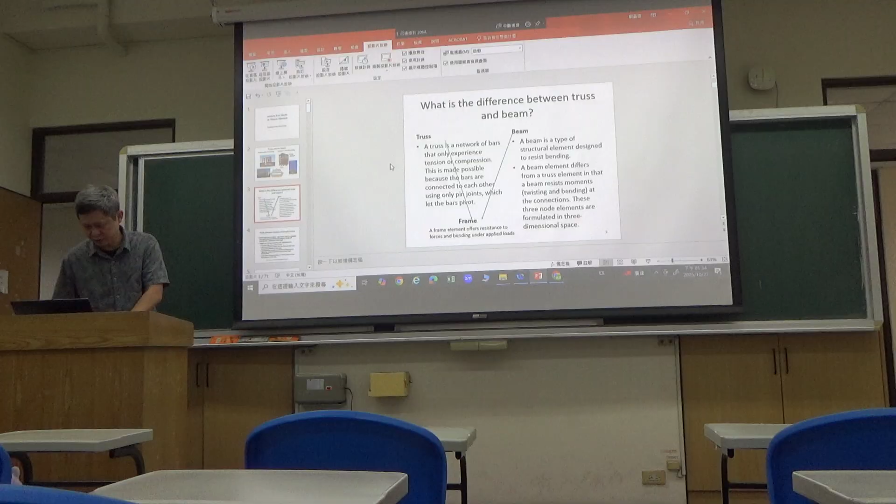Let's see. Okay, anyway, I'll try from here. See if the projections are working. Let's see. Wait a second, the projections...

One example of a beam structure is the bicycle frame. A bicycle frame not only needs to resist bending, it also has to support axial loading. So in this case, we combine beam together with truss to model a frame.

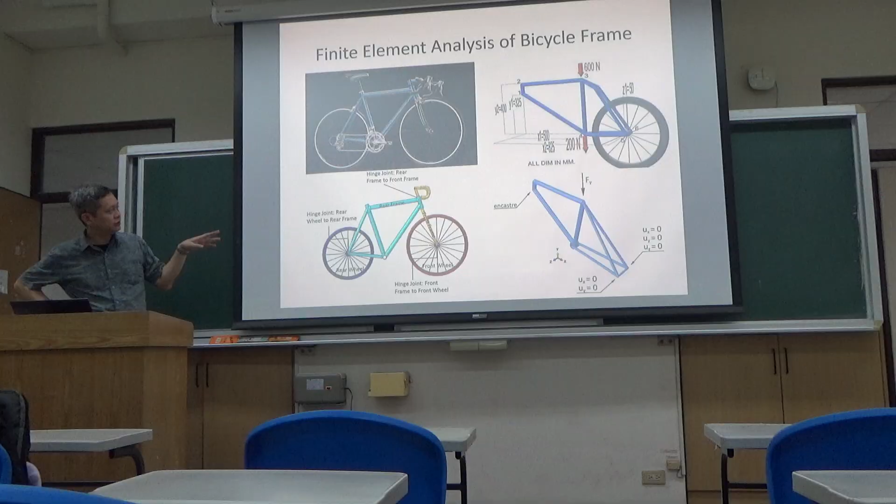Another example of a beam bending test can be seen from the ground testing of the F-16 frame. Let's watch a video of the ground vibration test of the aircraft, where the beam is bent. Let's see.

So this is a video showing the cantilever wing being tested. Okay, hold it up. Okay, where's the sound? You see, they've got the sound adjustment.

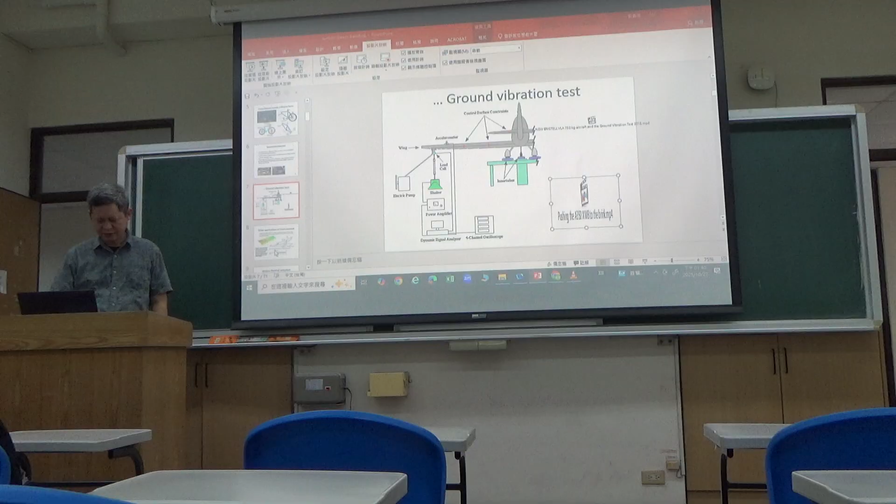In the sky, how strong does the wing need to be for an airplane? You can watch one or two examples of the structure. Because in the sky, the airplane wing, even though it looks like a cantilever, will be interacting with the air. The air will form vortices, and the vortex will go up and down.

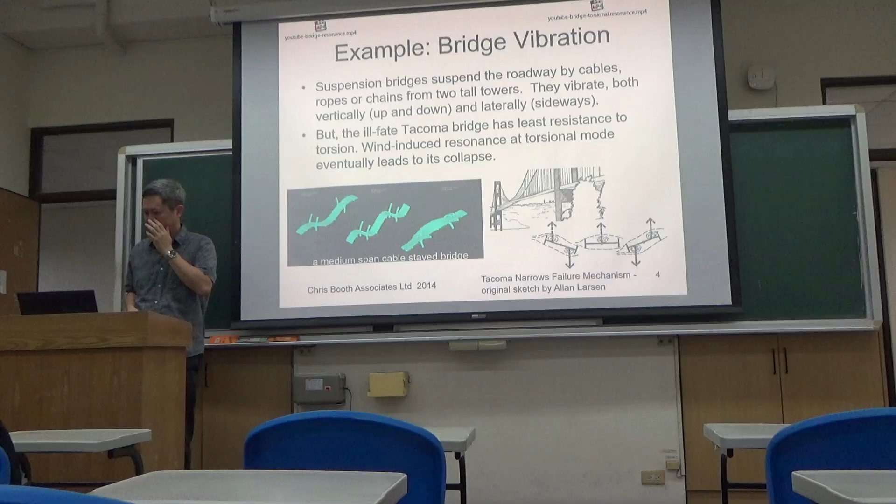This happens to be the same as with a bridge. The bridge is actually kind of like a structure, but the road surface of the bridge could be excited into bending, and that bending can happen quite differently. Let's watch the bending of the bridge, in an exaggerated way.

This is one kind of beam bending of the bridge. This is still a build-up structure, not a single beam. You can also see the torsion of the bridge.

Next we'll come to see the bending of the aircraft structure induced by the air. So the first example will be the bridge, and then later you'll see the aircraft structure bending. We're going to have the sound.

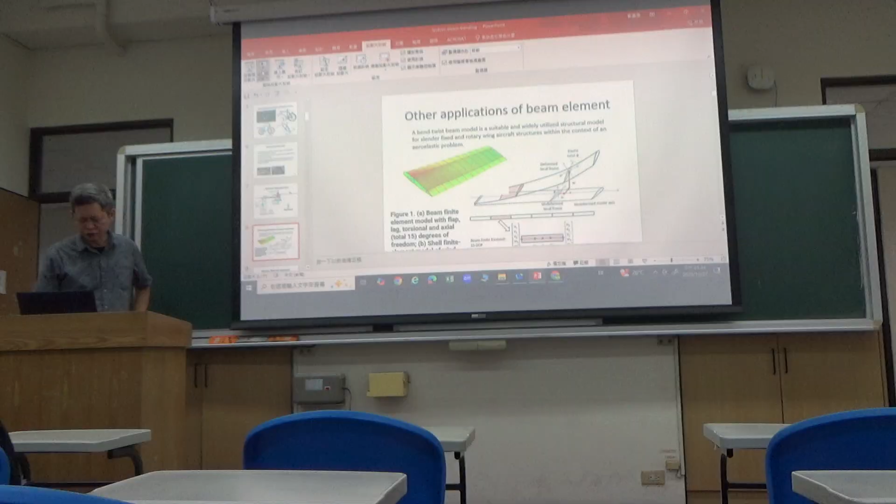So with this, now we know it is important to understand the vibration of the beam bending. But to start, we are not going directly to the vibration - we start with the static deformation. So how do we model this?

How to model an airfoil? You can model it in 3D form - it's made out of trusses, it's made out of the skin. Ideally you can model all the detail, but it is also possible to model the wing as a simple cantilever to give a first estimation.

For a beam element, you can break it down into many elements in series. This is still a cantilever, even though you've broken it down into a series connection of beam elements. However, if you break this into trusses, this is not a structure.

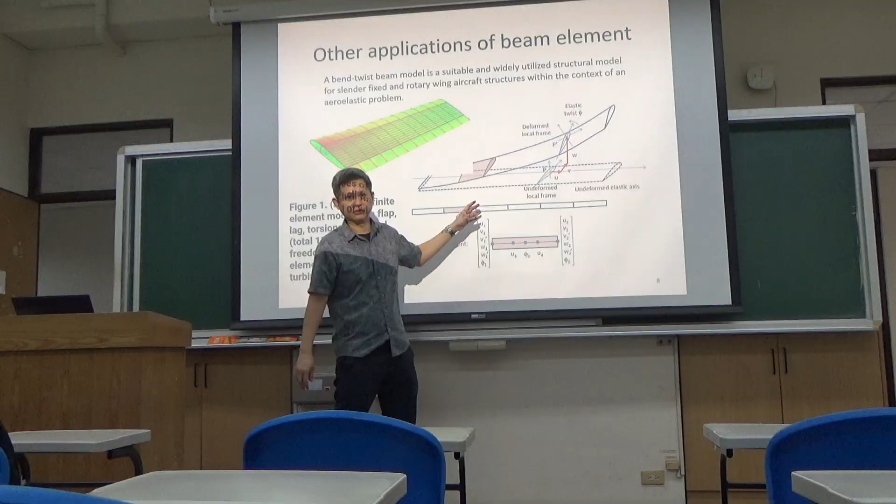So when we find this kind of beam element elsewhere, you can also find them on the bimetallic coil. A coil is also a cantilever. Take for example this bimetallic coil.

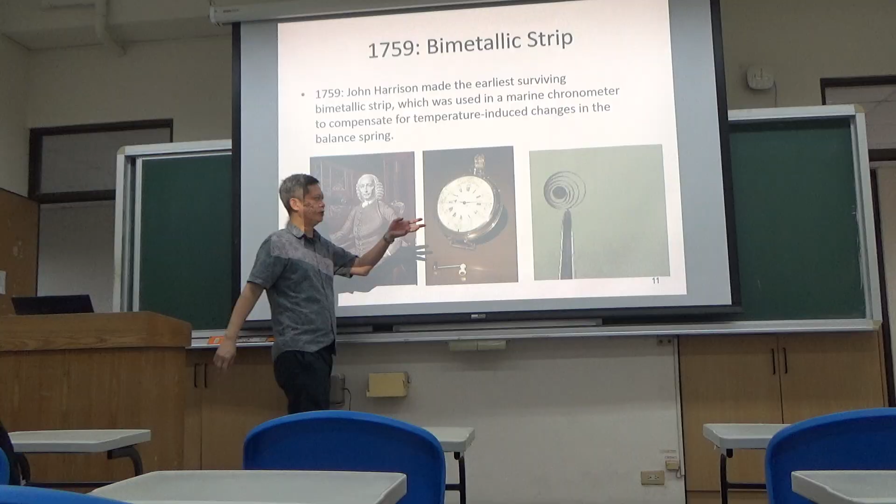You have a coil made out of 2 layers bonded together - the 2 layers are copper and iron strip. They are bonded together. When you heat it up, because of the difference in thermal expansion, you're going to have the unbending. This kind of unbending is okay.

So another form of the beam could be a bimetallic layer. Other than bonding materials of 2 different thermal expansion coefficients to generate bending, it is also possible to create displacement with the bending of a V-shaped beam. You have 2 segments - if you have thermal expansion in both legs of the V segment, you'll get apex motion at the tip.

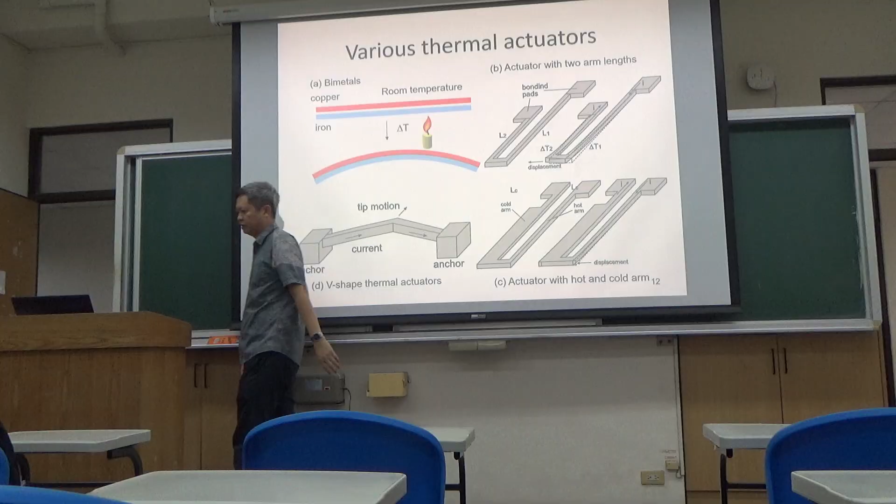Likewise, if you connect a long beam with a short beam, when you heat it up, because of the difference in thermal expansions, you can also generate bending. Lastly, you can also introduce bending by introducing a passive segment. Heating happens at the short segment here and the long segment here - the cold arm, which is wider, is not expanding or heating as much.

How do we model the beam bending? If you are using the V-shaped beam as an example, let's see - this is still about the application. You can see this kind of main structure.

It's built on top of the wafer, so you are making a very tiny beam. When you do the heating up, this V-shaped beam will undergo deformation - when you heat it up, it will expand.

So how is this expansion going to be modeled? If you model them as a rigid body, or linkages - this is what you're going to have.

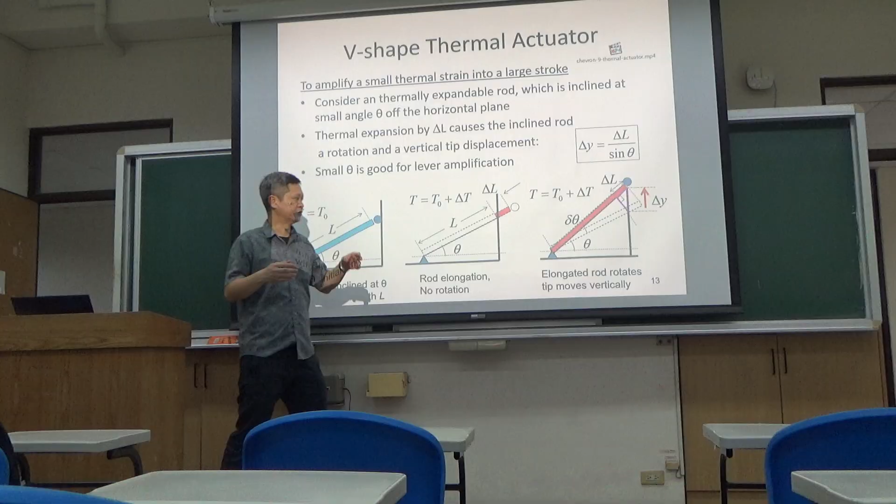This is a pin supported linkage which has the thermal expansion. So you can model this to find out what is the vertical displacement.

But in reality, beam is more than linkages because beam can resist bending. How are we going to model this beam bending? We have a very simple idea about beam bending. How do you model beam bending? You model it as a circular arc. Assume you have a prismatic bar. If you try to bend it into circular arc, one geometry you notice is you will form concentric circles.

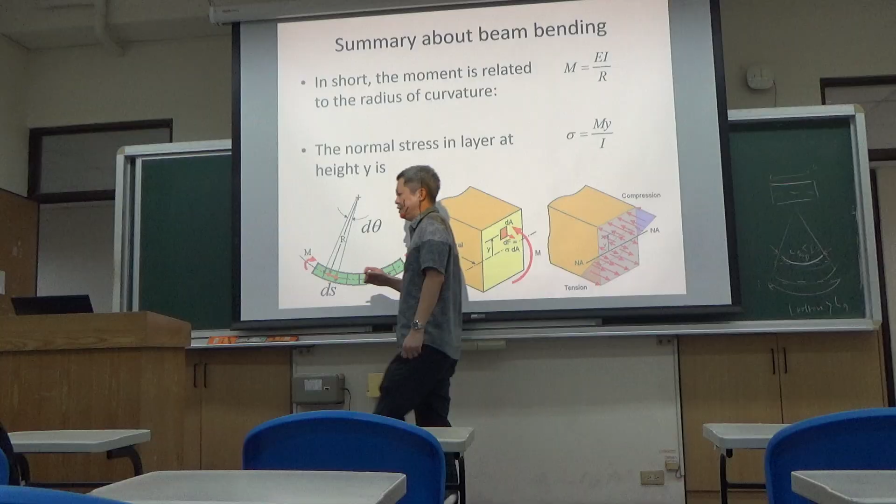So this is the finally derived formula relating the radius of curvature. How do you define radius of curvature? This is the radius of the circular arc at the neutral plane.

So in a way, if you learn Hooke's law, this is a spring. If you're doing the pull, then you see this pulling force will result in elongation. So this is the Hooke's law you learned about. But what about beam bending? This is a straight beam.

If you are doing the flexing so that it forms the circular arc, then the radius of curvature is what you measure, related to the moment.

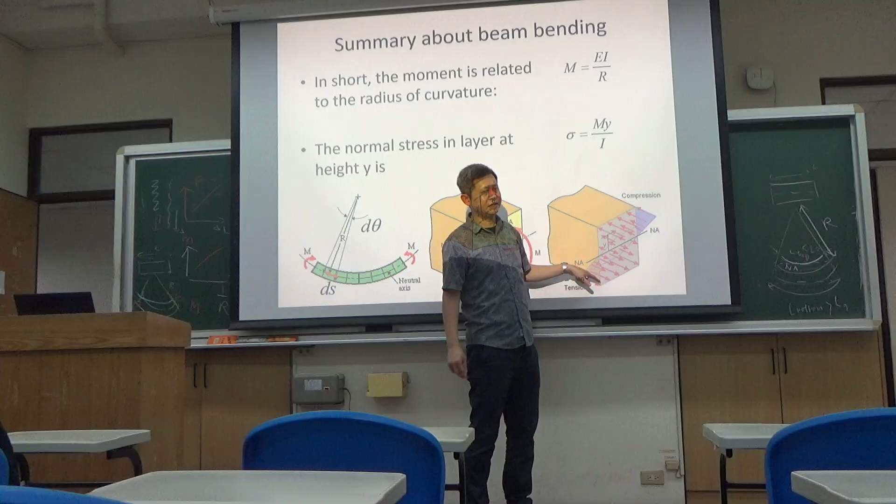And the stress we obtain is related to the moment as well as the height. Further away from the neutral plane, higher the stress. At the neutral plane, zero stress because we have imposed a condition. In this case, we are doing pure bending - there is no elongation at the neutral axis. So pure bending will cause this to form a circular arc, with the top surface and bottom surface being concentric.

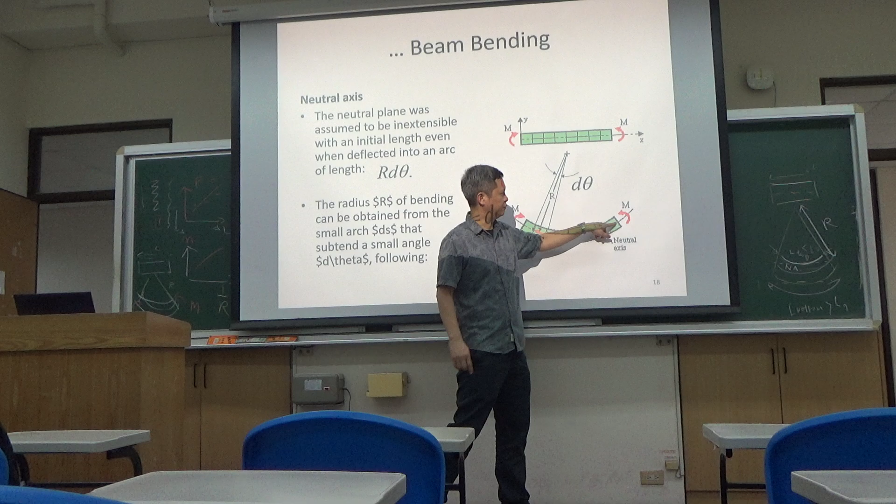And then how much is the elongation? If the neutral axis remains the same starting length as the straight beam, the inner side of this concentric circular arc will then have a reduction in length. This circular arc has an arc length of r d theta. How much is this arc length? You can describe it using dy/dx.

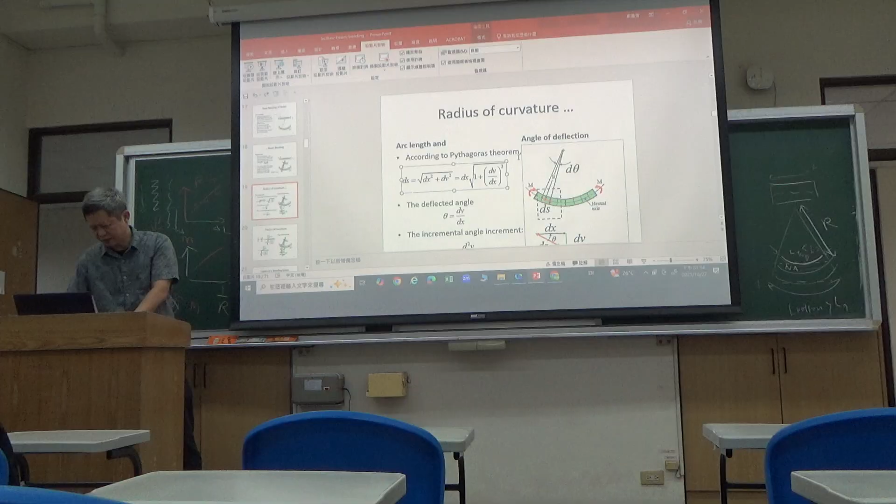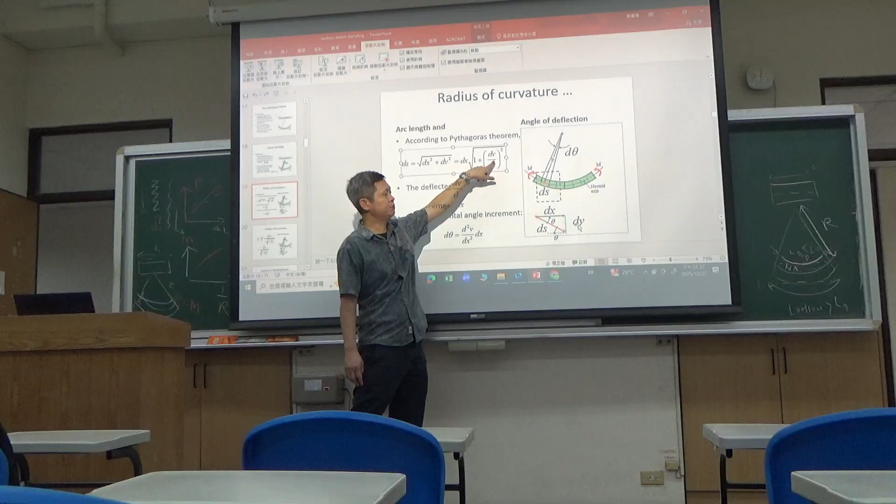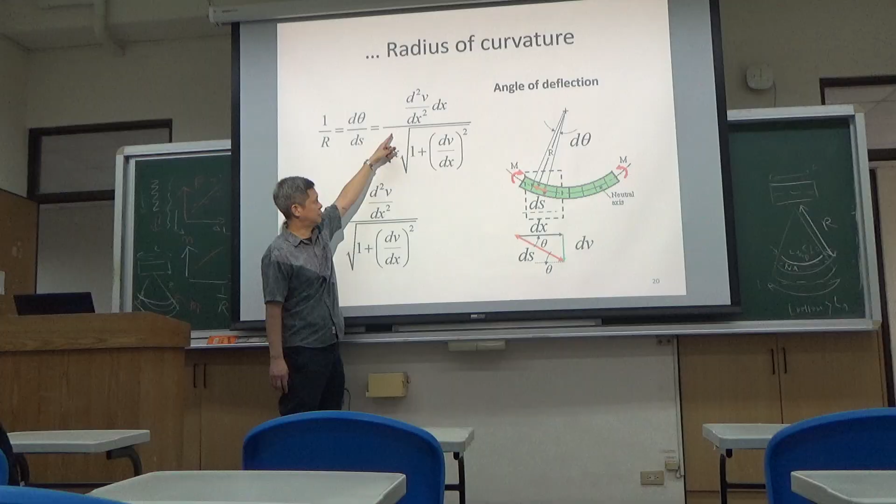So next, how much is the deflected angle? If you look at this angle again, this deflected angle is nothing but dV/dx, using the tangent of this right angle triangle. dV over dx is equal to the angle theta. If you combine it and do the partial differentiation of this deflected angle, you obtain the change of angle equal to the second order derivative of displacement times dx. If you take this change of angle times the radius, it's equal to ds. Using this relationship, 1 over the radius of curvature equals the change of angle versus the change of length. If you do the substitutions, you finally get your radius of curvature.

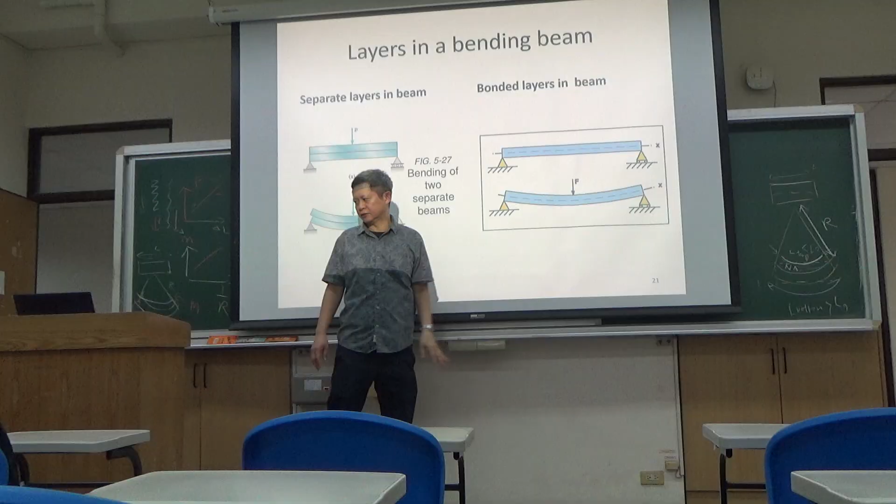So this is a revision of mechanics of materials. Next we'll come to the point - what makes a beam different from a stack of paper or stack of layers? A beam has two layers fused together. If they are not fused when subjected to bending, you can see the layers don't change in length - they can be subjected to interfacial sliding. But now if you fuse them together, it becomes stronger and can withstand greater loading. So what is the strain distribution along the layer of the beam?

To take this for example - we told you already, one segment of the beam was initially straight. When you bend it, you form a concentric circular arc. The one on top, A prime B prime, becomes shorter. Shorter by how much? The neutral axis has a fixed length equal to AB - it doesn't change.

When they form, this neutral plane remains the same length, which is r theta. However, the top surface is going to shorten. Why? Because it has a smaller radius than r. How small is it? It is r minus y.

This is the radius r. If you go up by height y, this reduces the radius. If you multiply by the same angle, you get the top arc length, which is shorter than the starting arc length r theta. So in the end, you have minus height divided by the radius of curvature.

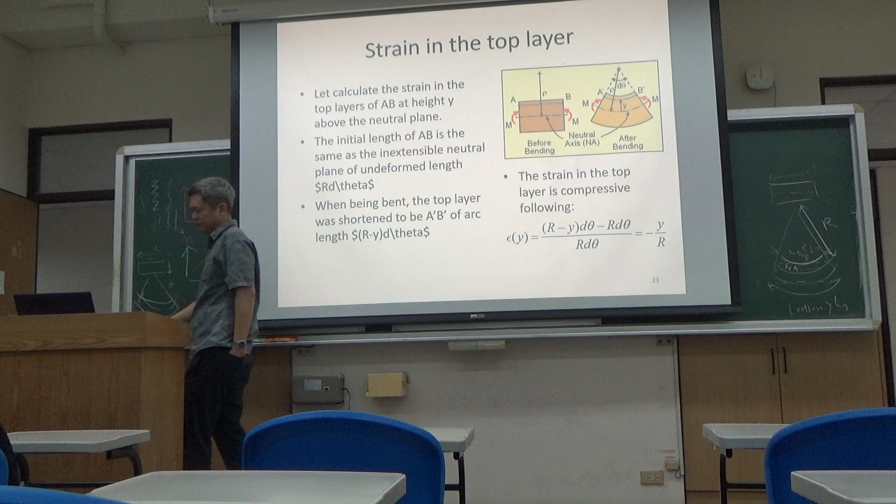As a result, if you take the strain and multiply it with the Young's modulus, you're going to get the stress. This stress is internal stress, and it's balanced by the external moment. This external moment equals minus the stress times the area, times the height.

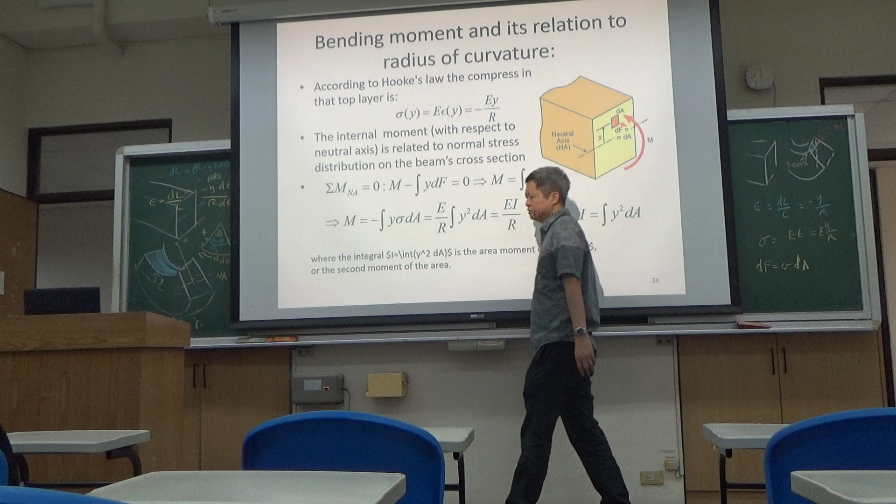So this is now the force. You can see this force dF is acting above the height y.

And then what's the moment? Your counter moment, above the neutral plane, is dM equal to y dF, which is equal to y sigma dA. If you do the substitution here, then it is equal to y squared over r times E dA.

So eventually, if you now do the integration from the top strip, top layer, all the way to the bottom layer, from y equal to top to y equal to bottom, then you finally obtain the moment equal to the Young's modulus times this second moment of inertia, the second moment of the cross-section area, divided by the radius.

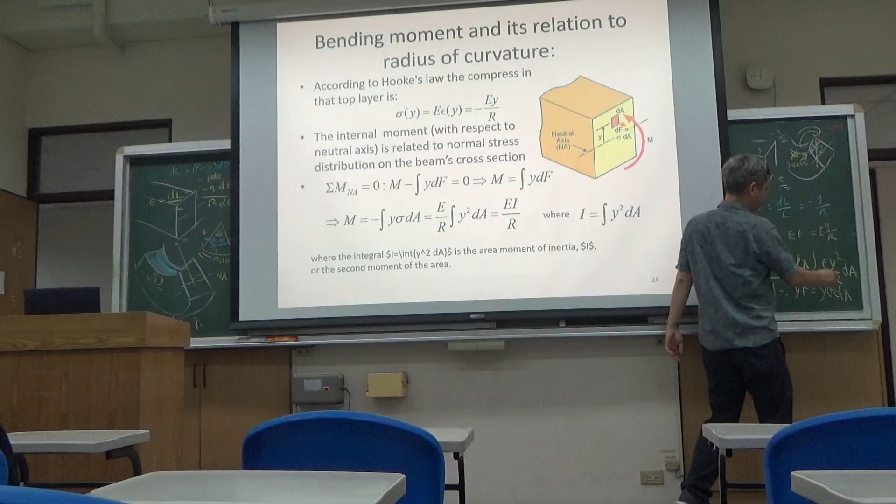Why is that the case? Because if you do the integration here, this is equal to I. So this is equal to EI over R.

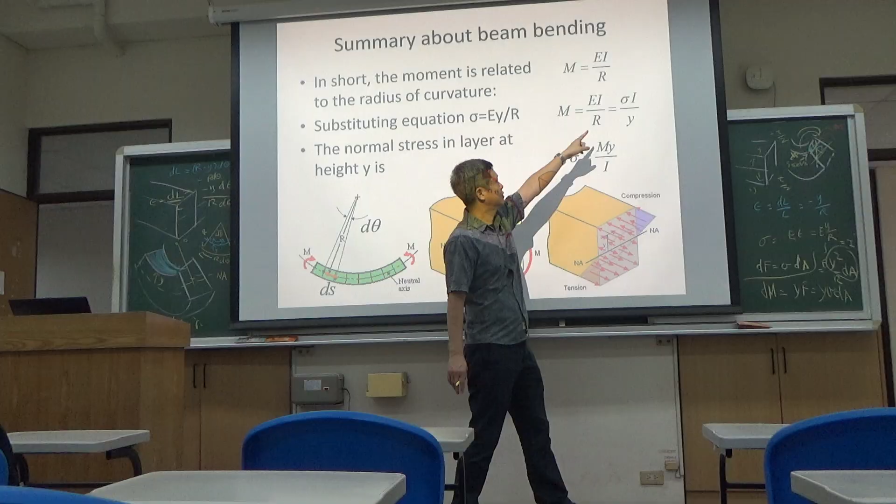So now we come back to the summary. Your moment is proportional to the curvature, which is the inverse of the radius of curvature. Of course, if you want to look for the stress, you can do the substitution in. You can find out what is the top stress. The stress level is M y over I.

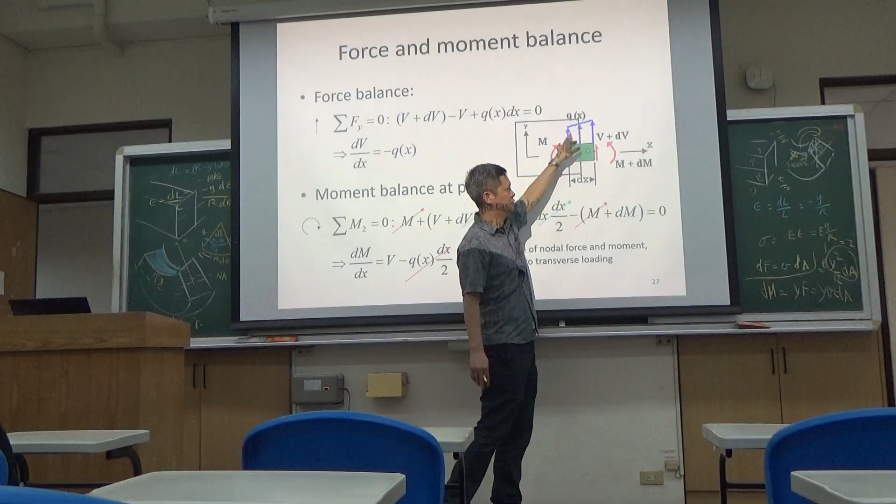Next, we do the moment balance at the right hand side at the center point O. If you do this moment sum, let's say clockwise, depending on what you like. If you want to do counterclockwise, that also works, and you'll eventually write the same thing. In the clockwise case, you have the left side moment plus the left side shear force induced moment, minus the distributed force induced moment, and then minus the right hand side moment.

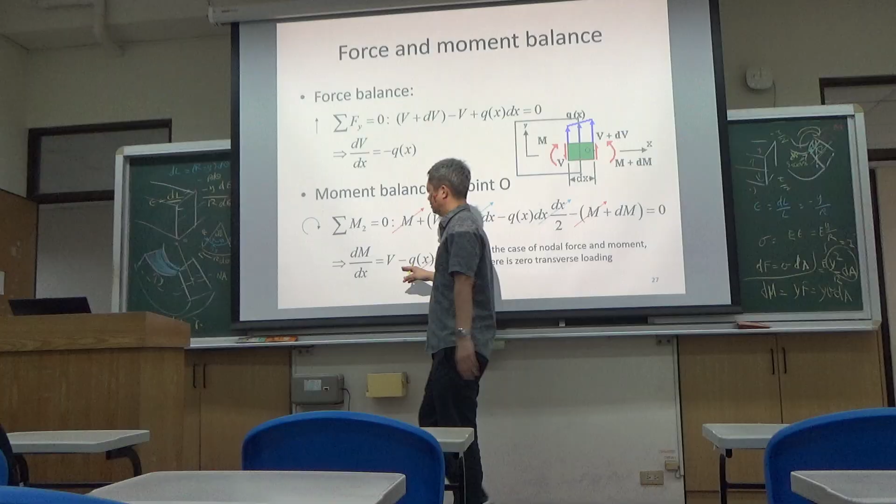After simplification, you find a common term, which is positive and negative, are cancelled out. Next we neglect the higher order terms: dx is higher order, we neglect it, and the dx squared term is also higher order, so we neglect it. In the end, you find that the change in moment between the left and right hand side depends on the shear force of the left hand side.

Now we can practice to find out how the shear force is determined. Take a cantilever for example. If you apply the force at the tip and want to find the moment, you have to determine where you are standing to get the moment. If you take zero moment from the free end and make a cut, standing at the edge close to the free end, you can see the counter moment at the point of the cut opposes the tip force.

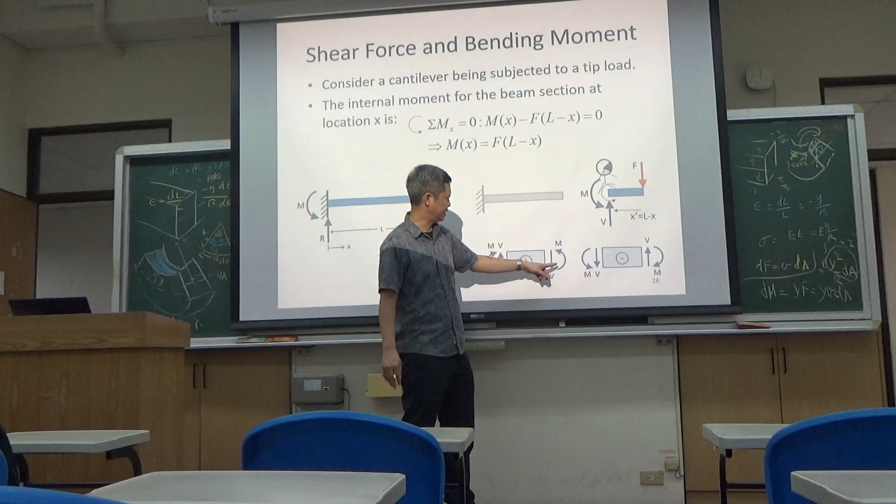However, if you now look at the inner side of the beam, this cut, which had a counterclockwise moment on the right free end, is now becoming... is it counterclockwise? I think you've got to do the opposing. So if you're doing the beam bending, you're still going to induce the same beam bending, but the left hand side and right hand side, you've got to change the direction.

So finally, we come to the beam element.

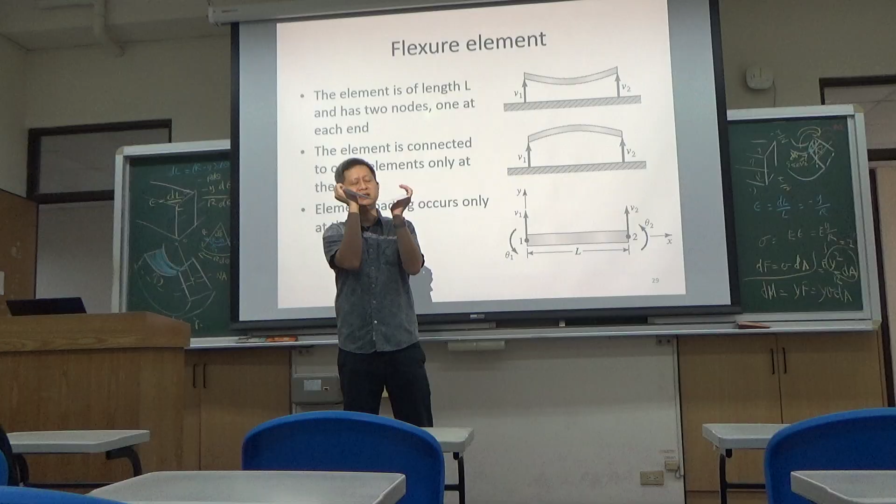When you say positive bending, your right hand side, or my right hand side, the left hand side, will induce a counterclockwise bending, and then my left hand side, the right hand side would induce a clockwise bending. So this is the convention of beam bending.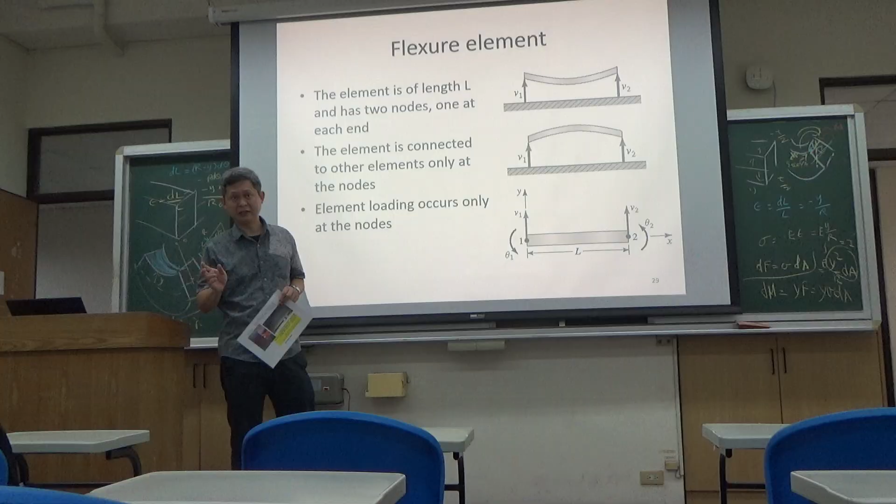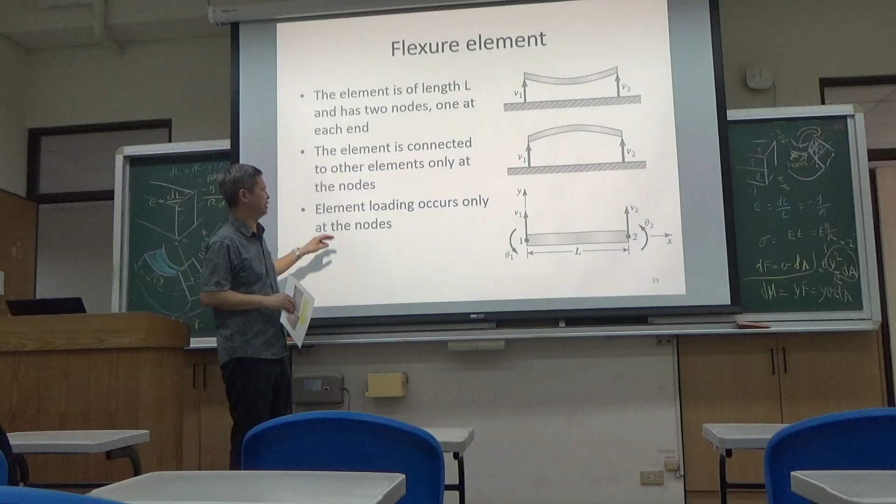So how about the vertical displacement? For the case of vertical displacement, you're going to have upward positive. This assumption is true no matter how the bending is; if it's going to be downward, then this displacement is going to be negative.

Okay, so using this, we are still applying mechanics of materials. Moment is EI over R. And what is your R? It is the second order derivative of the vertical deflection, times EI. So M is equal to EI times the second order differentiation of the vertical deflection over space.

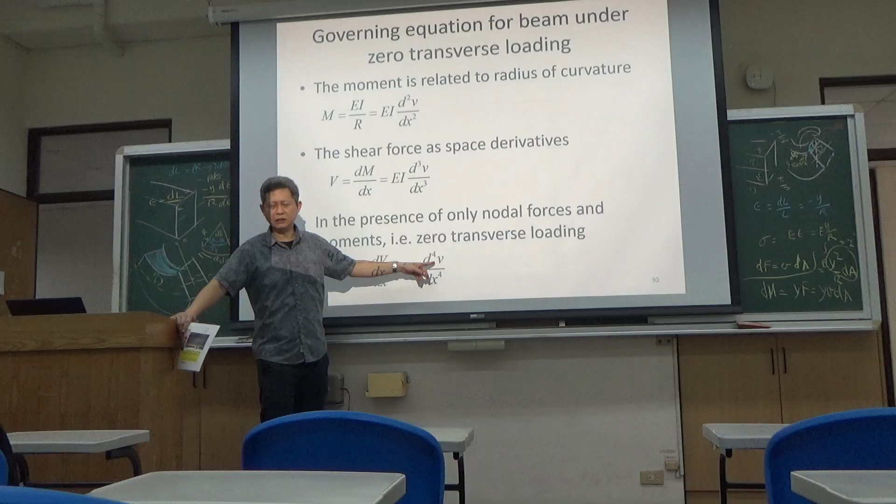And then what is your shear? Remember, your shear is dM over dx as we obtain from mechanics of materials. In the end, it's going to be EI times the third order derivative of the vertical deflection. Lastly, if you do one more differentiation, you obtain the distributed force, equal to the fourth order derivative of vertical displacement times EI.

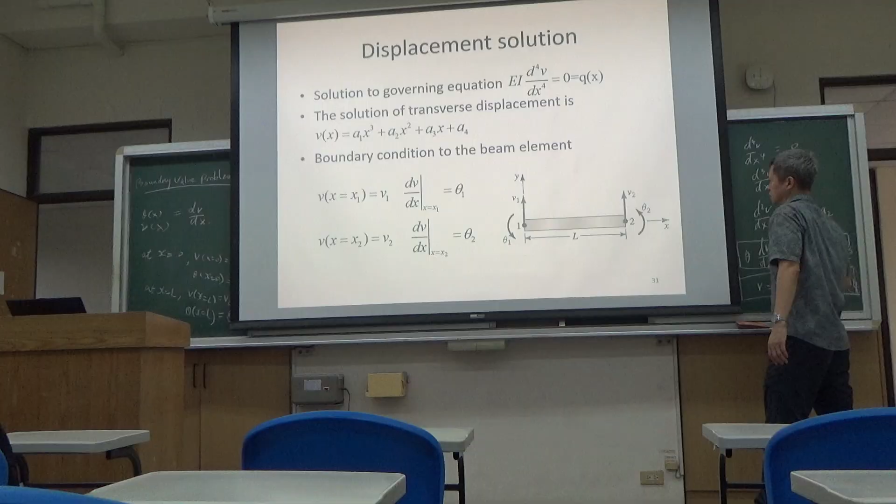So we're going to do the substitution here. 好，那我们就开始来解。那你第一步要解的是什么？我先盖住。我先解这个左手边。Okay, let's see the top one. I first now going to substitute the boundary on my left hand side. 如果你忘记了，看这张图，这个左手边的这个边界图，位移是 v1，角度是θ1，一个向上，一个逆时。Okay，这是第一个边界。这边界好找。When x is equal to 0,

when x is equal to 0, these three terms all go to 0. So your A4 is equal to v1. Okay, and then when x equal to 0, these two terms are all going to be 0. Your A3 is equal to θ1. Okay, so in this way, you got A3 is equal to θ1, your A4 is equal to v1. Okay? After that, what do you do? You do the substitution.

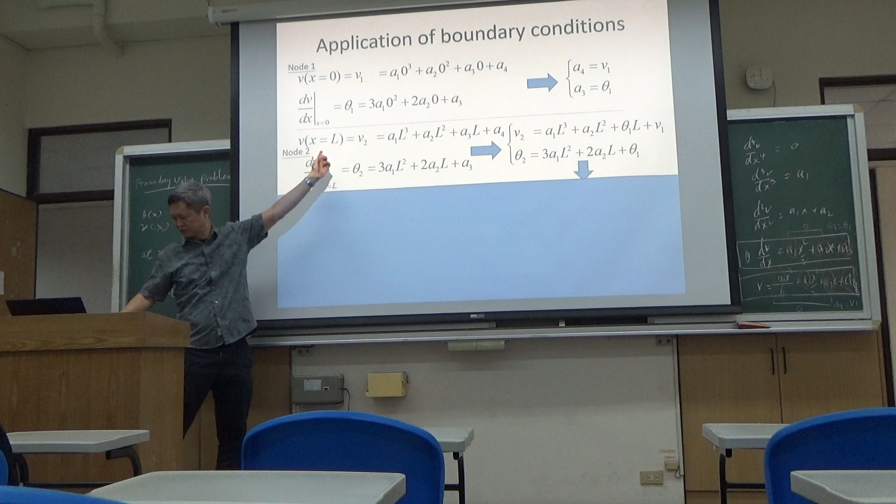Okay, what are we going to substitute next? We're going to substitute the second boundary condition. At x equal to L, my v is equal to v2, my angle is equal to theta 2. Okay? By doing this,

okay, v at x equal to L is equal to A1 L cubed plus A2 L squared plus A3 L plus A4. If you substitute what you know about A3 and A4, then you will have the expression simplified with two unknowns. The only two unknowns are A1 and A2. A3 and A4 are solved.

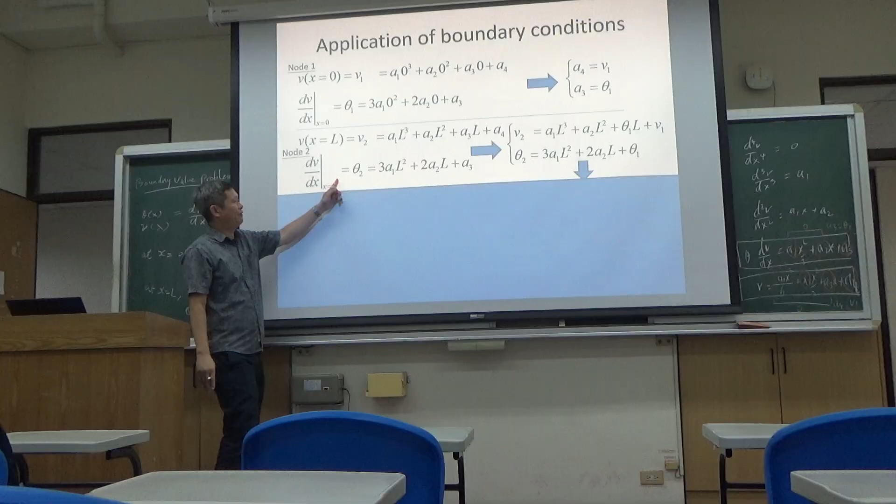Okay, and then next, you can make use of the gradient of the vertical deflection to find the angle. Angle of deflection is 3A1 L squared plus 2A2 L plus theta 1. Okay? So what are the unknowns?

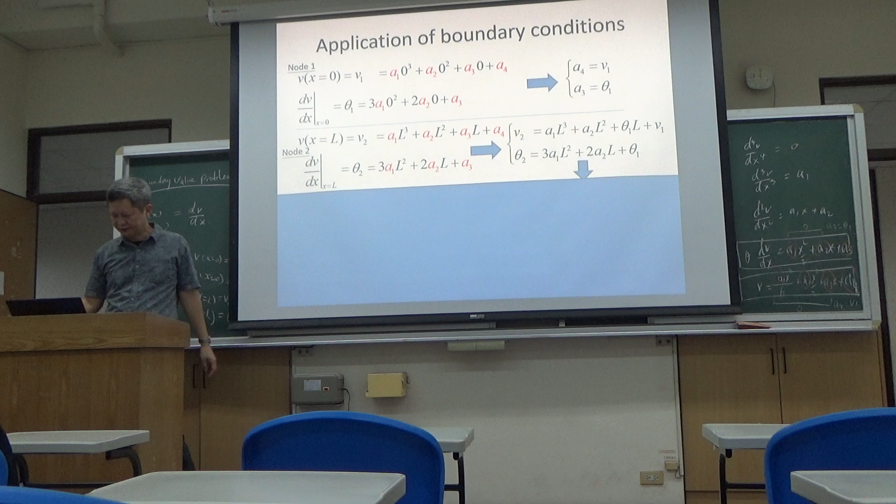In the end, you are left with only two unknowns. How do we solve for your unknowns?

Okay, we do the solution by Cramer's rule. Okay, anyway, you can solve all these funny things. Okay? But I think you shall do the solution by Cramer's rule. 中间那个你们要怎么？高斯消元法则去做，那我们现在就用这个Cramer's rule。Okay, so in the end, we solve for your A1, A2 as for this expression.

Okay, you are not sure? Yeah. So A1, A2 are the unknowns. Okay.

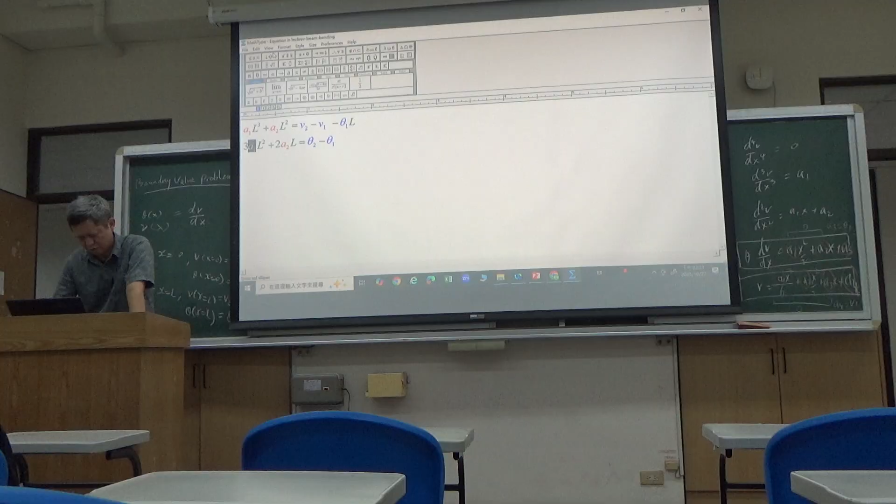What was your unknown just now? My unknown was this A1, A2. The unknown to be solved. 所以你就知道你的这个矩阵法的这个好处了，因为矩阵法可以帮你解这个每个地方解得很快，而且哪一个是未知，哪一个是已知的都清楚。不存在这个模糊地带。After you have done the coefficient determination,

okay, what do you have? You substitute all the variables A1, A2, A3, A4 into the expressions. You eventually manage to find V equal to the sum of a few terms. Okay?

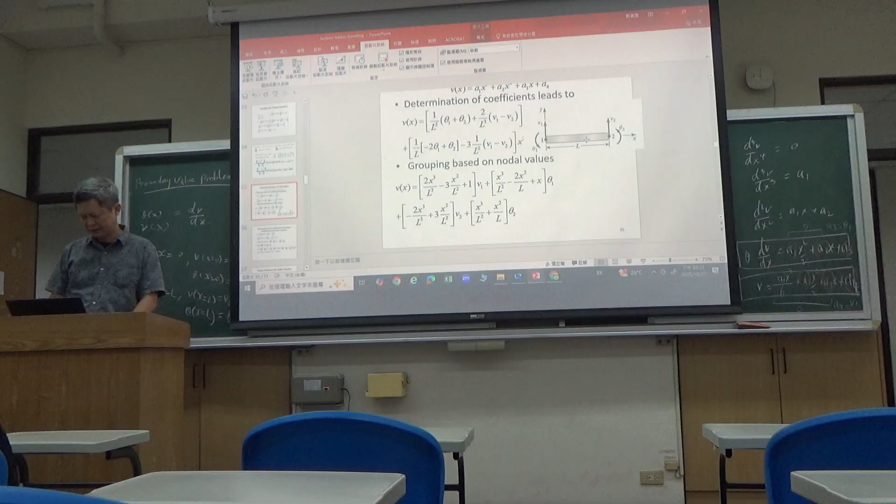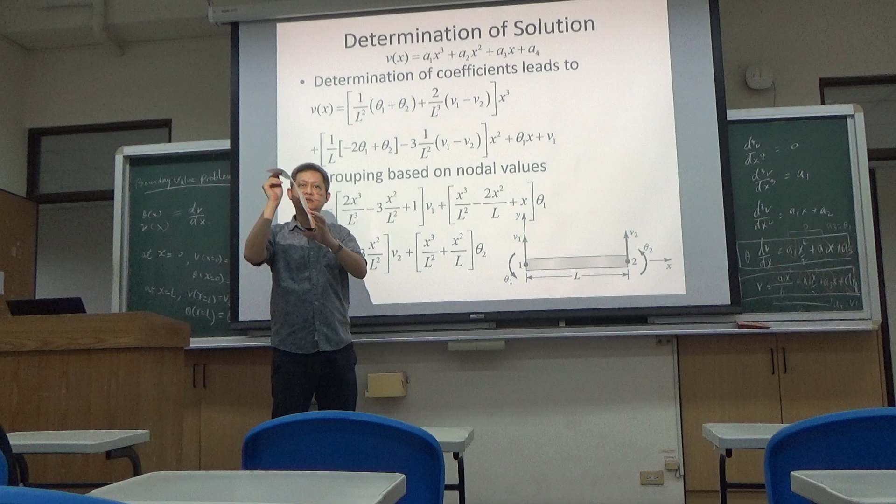所以我们第一个式子写的是什么？第一个式子写的是你的位移是空间分布。你如果忘记这个是怎样的一个叙述？我把这个图拉上来，放在上面。OK，你的位移是空间分布。但它这个分布是什么样子？答案很简单。OK，你拿一张纸。What is the shape of the displacement distribution？好，我们本着那个叫做叠加法的原理，你觉得你第一个这个空间分布的这个位移？OK，比如说我右手边向上抬高一个单位，这个函数它就应该长得跟这张纸的形状一样。那如果左手边其他都不动，我左手边向上抬一个单位，它就长了这幅模样。对，第四个情况，我右手边扭一个角度，它就长了这个形状。我左手边扭一个角度，它就应该长了这个形状。Okay?

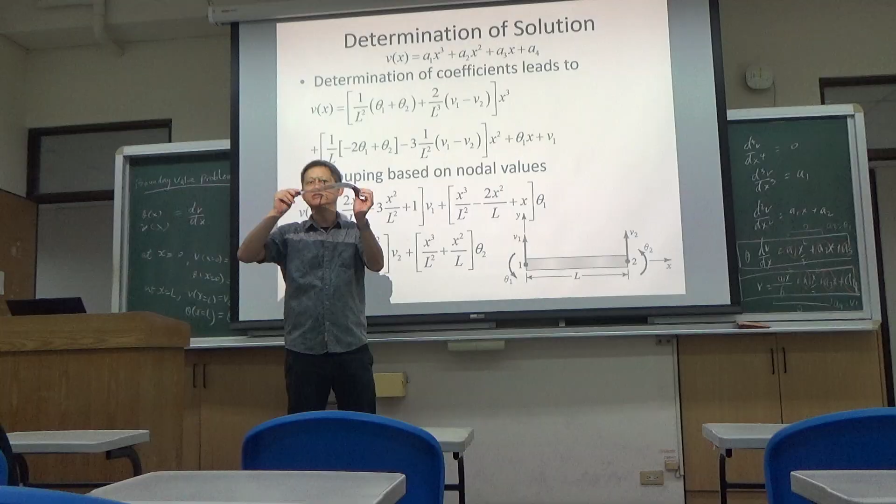So the polynomial here is a function of space. Okay, let me write this. The polynomial function V is equal to coefficient A1x cubed plus A2x squared plus A3x plus A4. You know these are

v1, v2, theta1, theta2. But the coefficient here, this is a more complex function of theta1, v1, theta2, v2, x. Yeah, a different function. Okay.

This writing concerns the shape change over the length. Okay. 这是我们一开始解的题目，我们这个叫 x 的 polynomial。但是我们不要忘记，我们最关键的是边界值。What we care most is not the shape function.

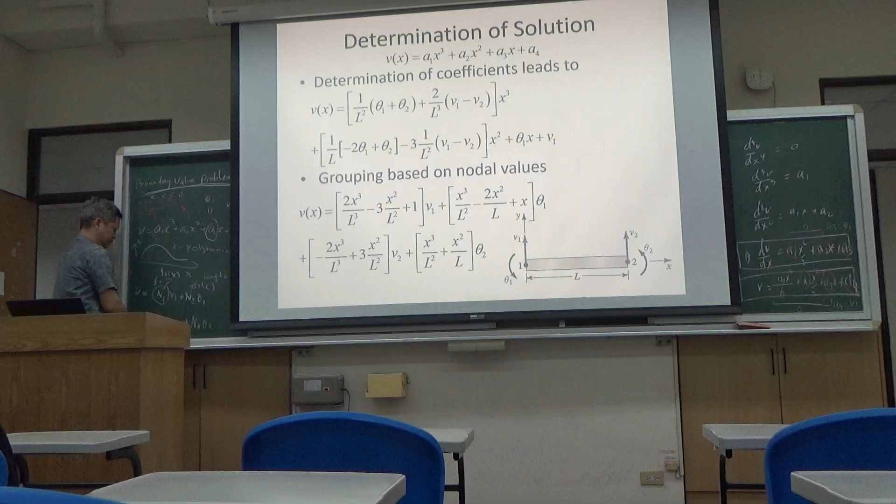These functions are functions of x, and these are functions of x as well. This one too, and this one. But their shapes are different.

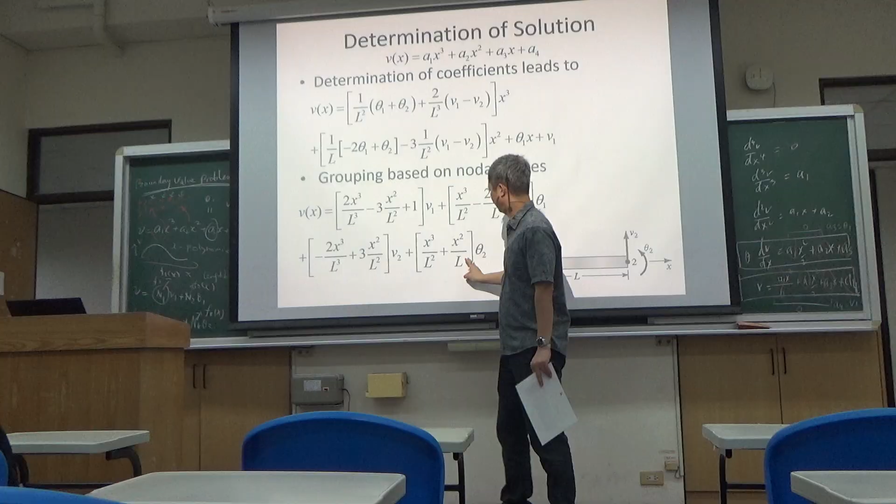This is the grouping of my expression. In my grouping, I got theta 1 in blue color, theta 2 in black color, v1 in red, and v2 in pink. Now I do the grouping: v1 is multiplied with shape function 1, theta 1 is multiplied with shape function 2, v2 is multiplied with shape function 3, and theta 2 is multiplied with shape function 4.

Now the important thing is the plotting of the shape function. How can you express this? This shape function is a function of space. And then you multiply it with the boundary values theta 1, v2, theta 2, then you should solve for that.

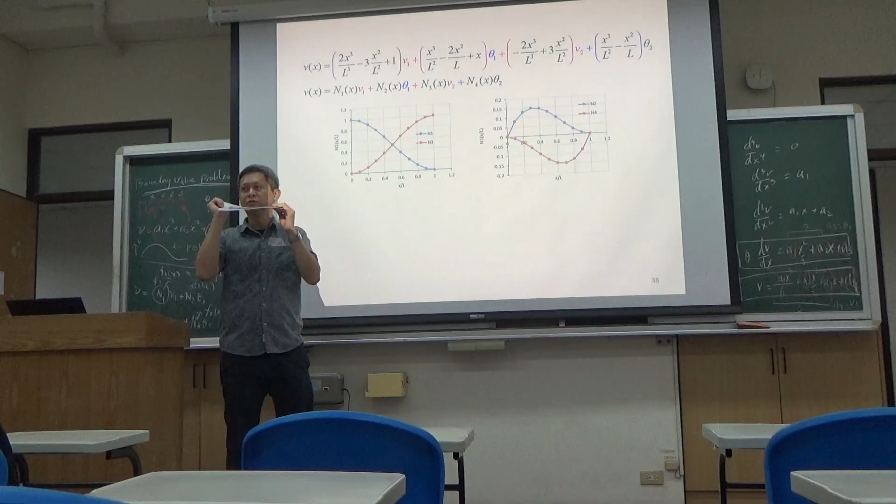Then next, you do the same for the right hand node. If you deflect the right hand side by 1 unit, all other boundary conditions are fixed, even the rotational angle fixed to be 0. Then this is the third shape function.

Take a piece of paper and move it yourself—this shape function will completely match your understanding. Next, we're talking about the same piece of paper, but rotation: the rotation of the left hand side to be 1 radian. I did not do any translation, only the left hand side rotation by 1 radian.

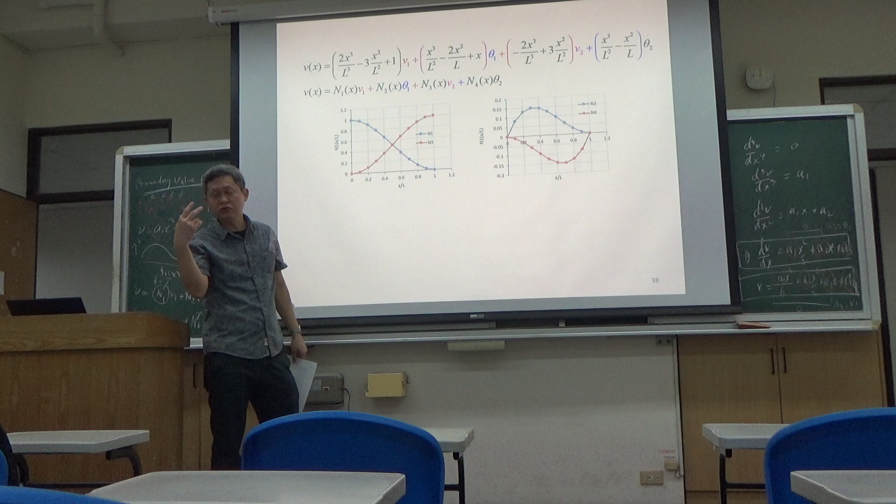What is 1 radian? 3.14 radians is pi, about 180 degrees. 1 radian is about 1/3 of that, so close to 60 degrees. So this 60 degree counterclockwise rotation will bend the beam like this without any vertical displacement.

If you do the same on the right hand side, you should do the flexing—this one I need to flip to the other side. It's not negative, right? This one flips to the other side, 1 unit.

With this, we know the interpolation function for displacement.

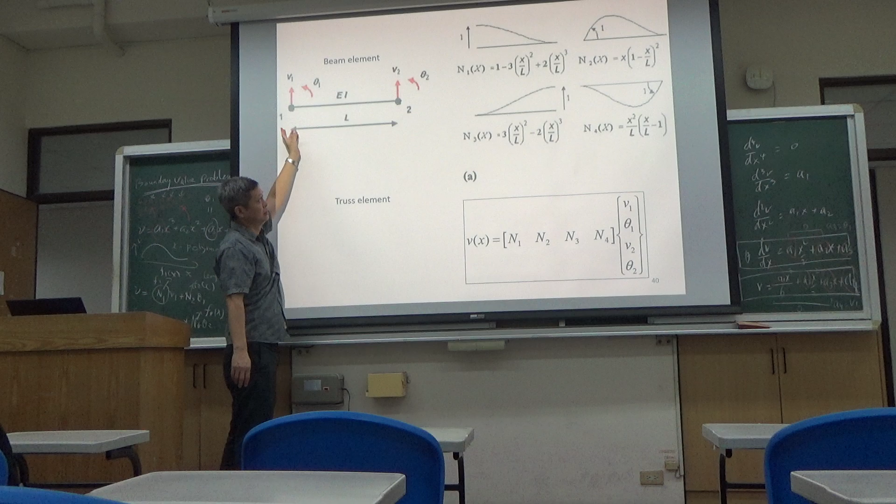So up to now, we get the right shape of vertical displacement. If you do 1 time differentiation, you got the angle of deflection. If you do it 2 times differentiation, you got the moment.

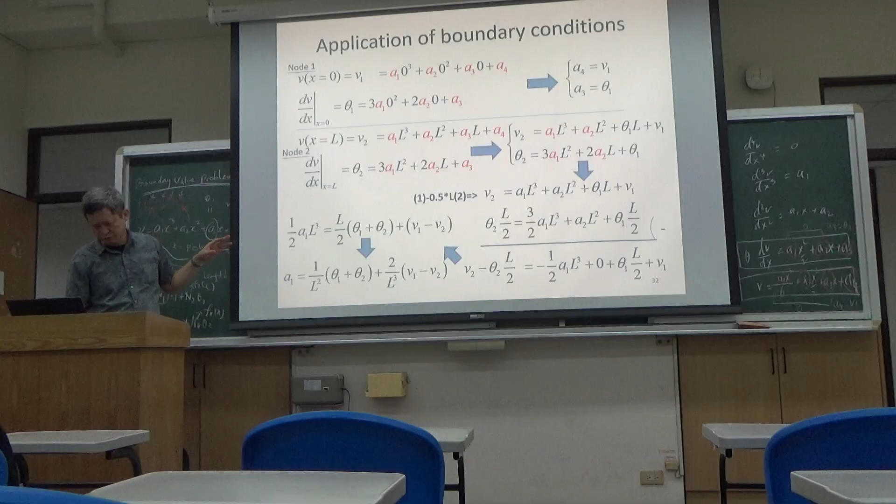Recall the formula here. 1 time differentiation gives you the angle. Second time differentiation gives you the moment. Third time differentiation gives you the shear force. This is what you previously defined.

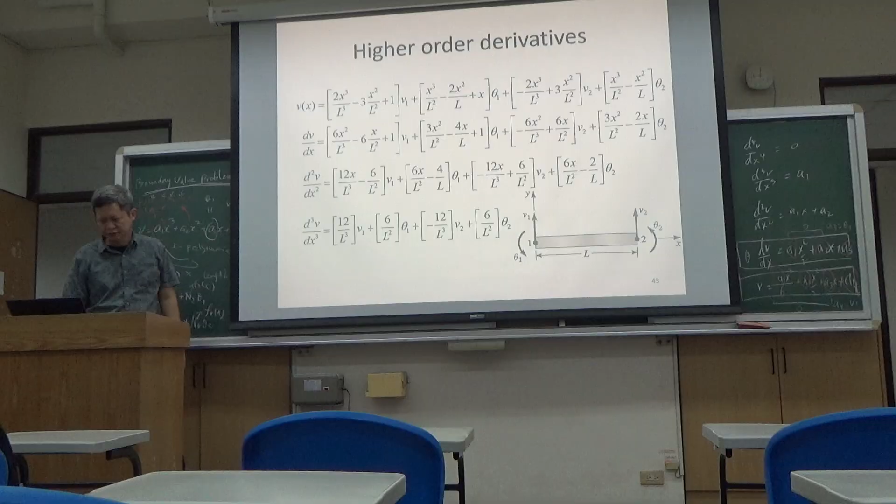After obtaining the expression of the shape function, you can do the differentiation 1 time, 2 times, and 3 times. So this is the final expression: 0 order differentiation, 1st order differentiation, 2nd order, 3rd order.

And now, important thing comes here. For 2nd order differentiation, you know second order differentiation of vertical displacement gives you the moment. But here, how do you define the moment?

The moment here, unlike the conventional moment definition—conventional moment definition is counterclockwise positive on the right hand side and clockwise on the left hand side. Do you need to take care of this?

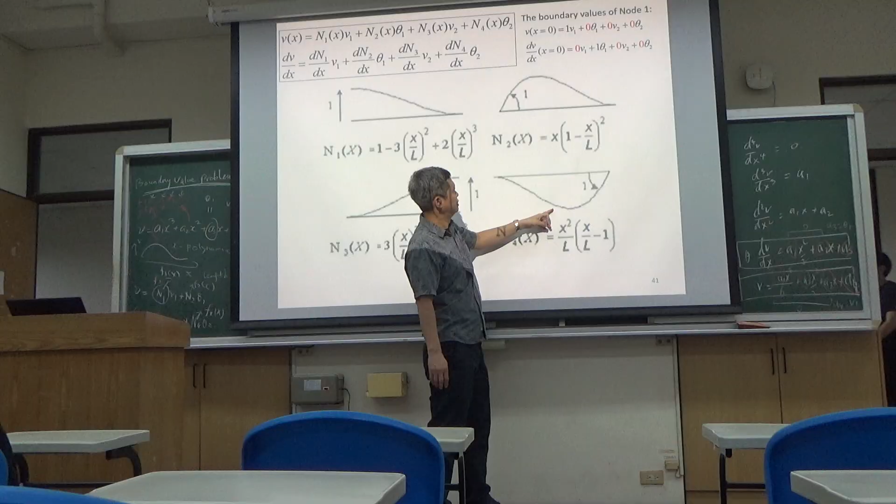But in the expression, what do you see? In the expressions, because now we take counterclockwise angle positive on both the right hand side and left hand side, if you do partial differentiation twice with this convention, if the shape functions are all positive, you will not get the moment balance on the left hand side and right hand side.

But because the shape function has taken care of the sign convention, you see the right hand moment—it is clockwise. But if I stick to the moment being positive clockwise, then this counterclockwise moment will be negative.

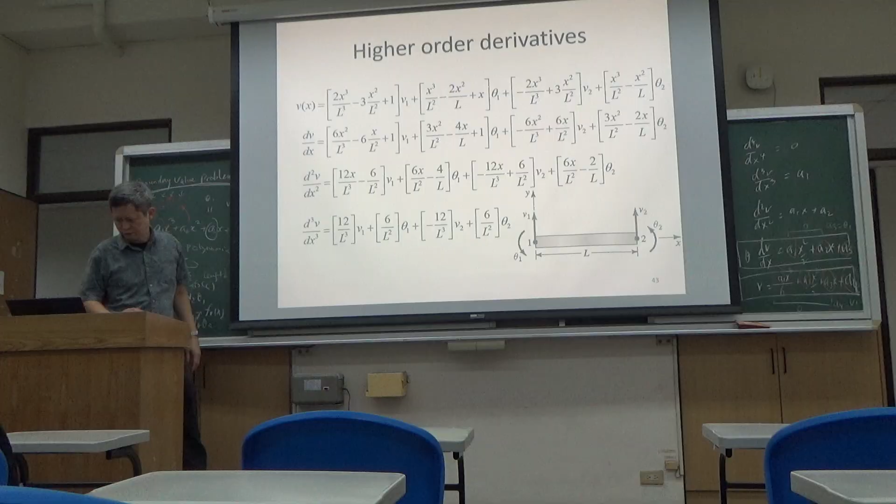And then, what about the vertical force part? The vertical force part is fine—let's see how the vertical force, the shear force, is defined. Look at our shear force: if you look at the shear force on the beam, on the left hand side, the convention tells you it is upward positive.

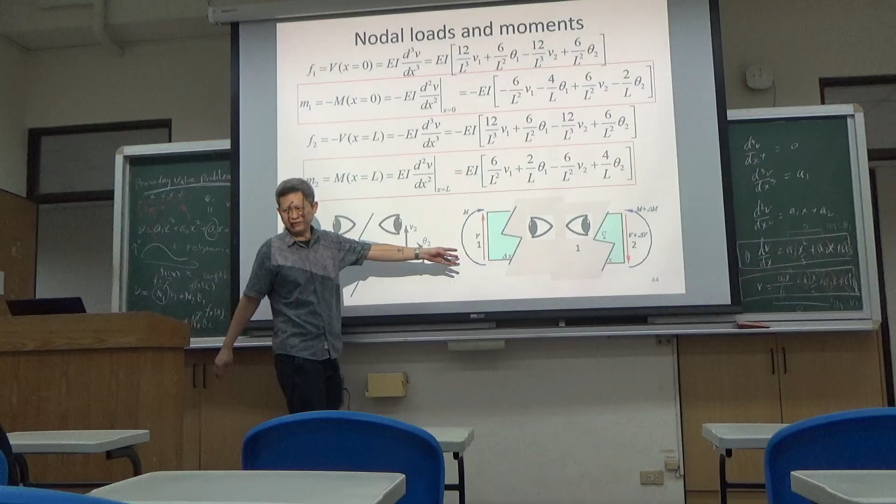On the right hand side, the convention tells you it is downward positive. But in my definition of the vertical displacement, it is both positive. How do I tally with the convention of mechanics of materials? How do I tally such that the force balance is zero or nearly zero?

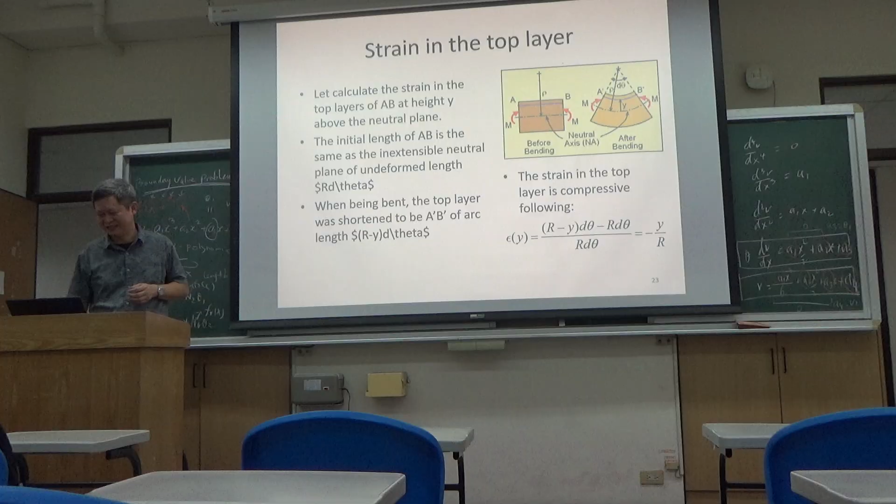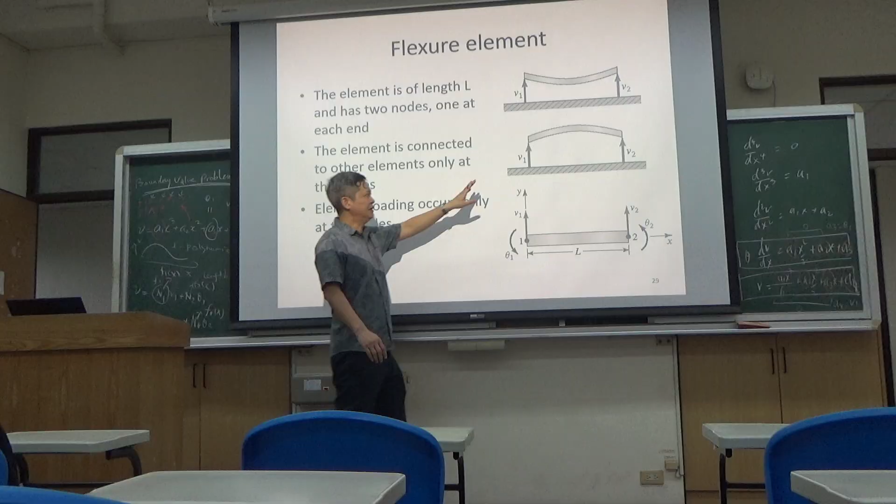But finite equilibrium has to be balanced. So in the case of mechanics of materials, yes, left hand side and right hand side shear force sum can be non-zero because of the distributed force. But look at the finite element. What is the assumption of the finite element? The finite element assumes no distributed force.

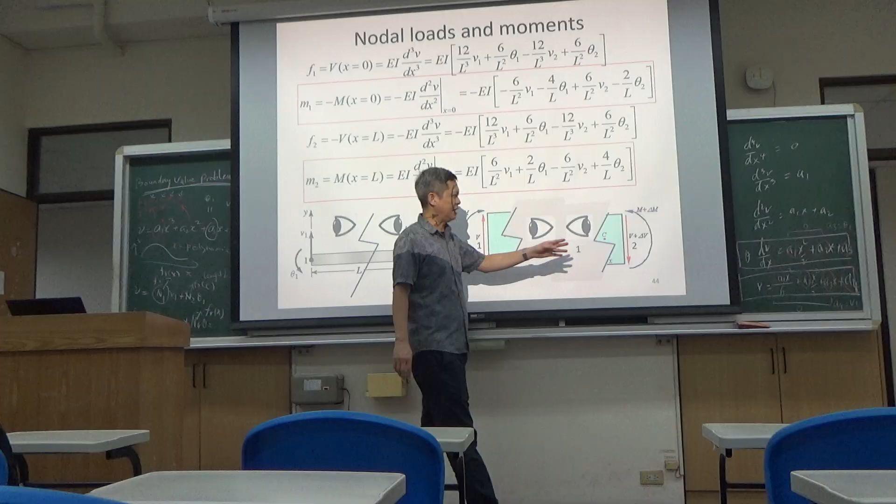I define it upward positive in my convention of mechanics of material on the left hand side. I define it downward positive in my convention as well. But now look at your vertical displacement - both are positive.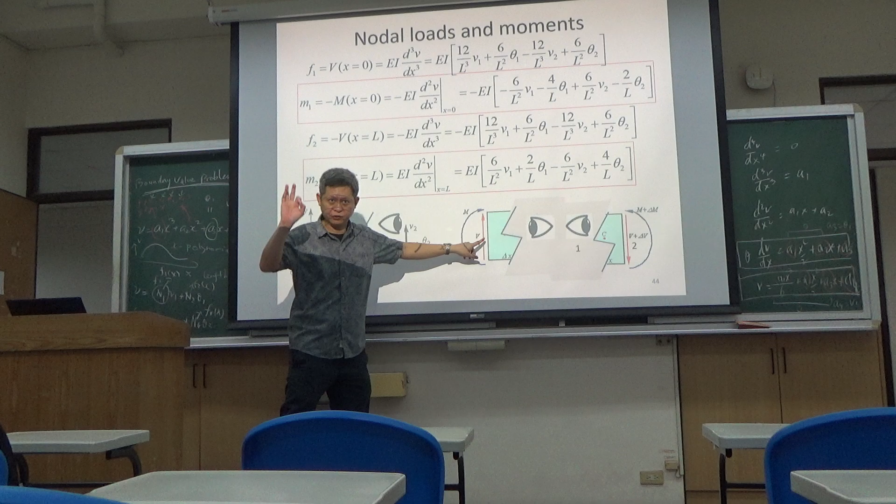So when you do the partial differentiation, the good thing here is F1 obtained from third order partial differentiation of V is giving me a positive value because they tally in direction. Vertical shear force and vertical displacement are tally.

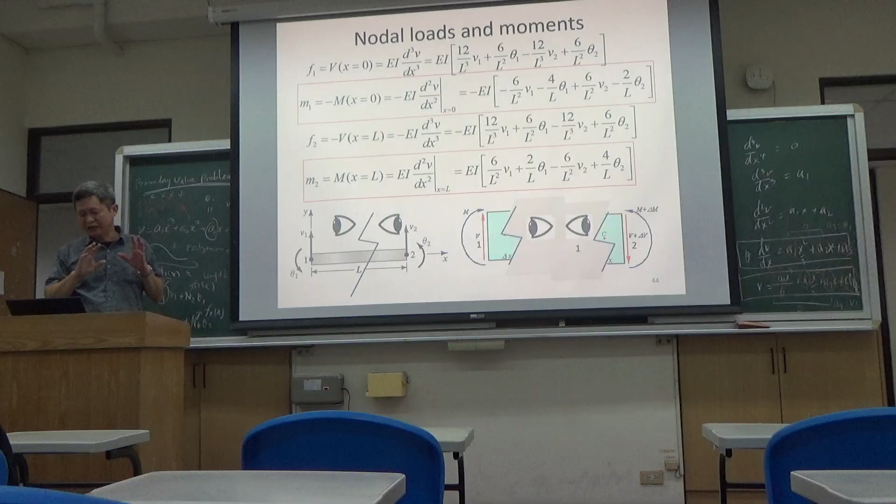But on the right hand side, V2, the vertical displacement is defined positive upward. But my shear force is downward positive. So here you can see F2 is negative. So with this, what I obtain can fully be confirmed to be right in convention.

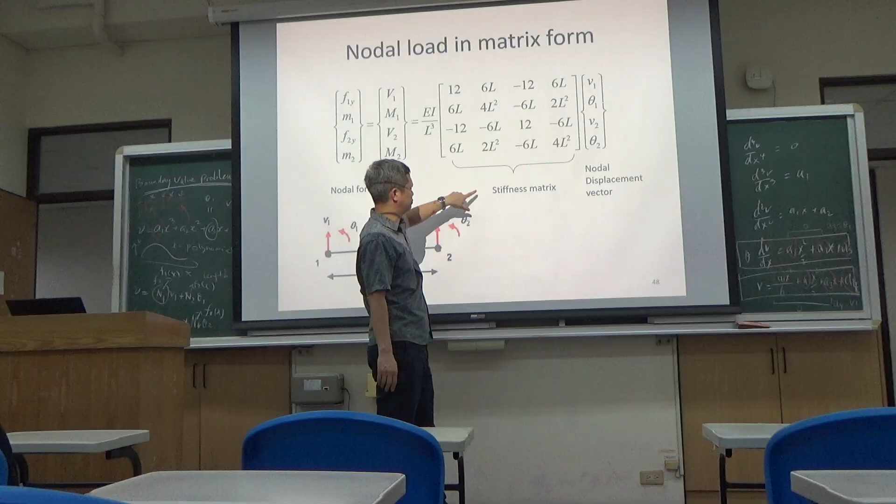The whole thing, including the coefficient, is what you call the stiffness matrix. And then the right hand side is the vector - this is the nodal displacement vector. This displacement includes both the vertical and the angular displacement.

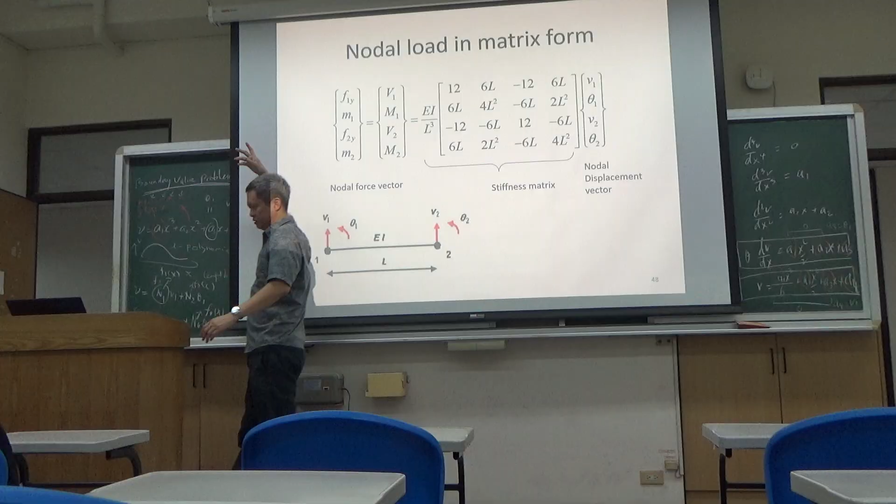So using what we have obtained as the beam element, left hand side is the force moment vector. You can see left hand side is fixed, so they get the shear force reaction force, and they also get the reaction moment. The right hand side, node 2, is subjected to downward force, 0 moment. This equals the stiffness matrix times the displacement vector, either transverse or angular displacement.

Because the left hand side is fixed, V1 is 0, theta 1 is 0. So in the end, you're only left with this small matrix to solve. This small matrix has the force vector minus F, 0, 0 moment equal to EI/L cubed times the 2x2 simple matrix: 12, minus 6L, minus 6L, 4L squared.

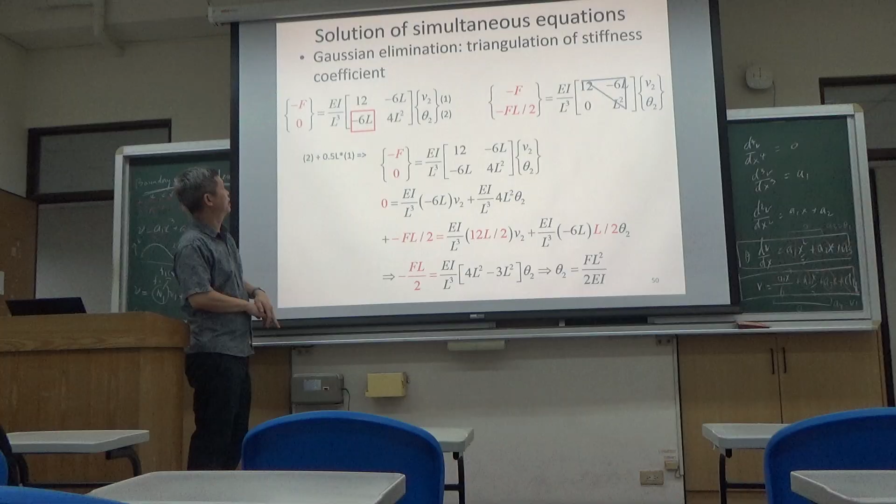So this is a 2x2 matrix. You can do Gaussian elimination, but if it's 2x2, I'm more than happy to apply Cramer's rule. So to solve for unknowns V2, theta 2 - let's say V2, I can find V2 is equal to minus F L cubed over 3EI. So in this case, it tallies with my solution.

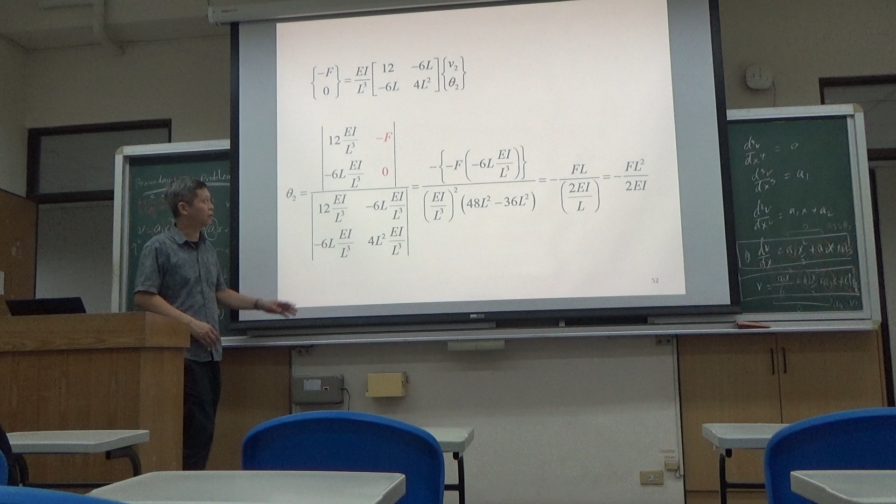Likewise, you can obtain the tip angular deflection. This is FL squared over 2EI. It is negative - the negative sign means that it's not counterclockwise, it's clockwise.

So you should know that under the vertical tip loading, the displacement is negative, and then the angle of deflection is also negative.